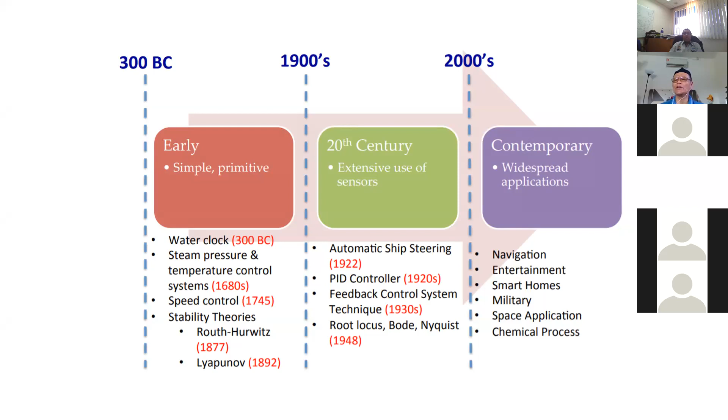And in contemporary times, applications extend to navigation, entertainment, smart home, military, space application, chemical process, and automotive, and any dynamic system. So you see this control theory has evolved since before 300 BC, and it's still very relevant now when we talk about Industrial Revolution 4.0. Control theory can be used in all these elements - it's very important.

First I talk about human control. When you're talking about control, you're talking about anything - it can also be about human. So you see, if you want to ride a bicycle, you have to know how to control the handles. You have to know the dynamics before you can have stability. If you fall down from the bicycle, it's considered that you are not in a stable condition. So that is the first thing about control.

Safety is there. And then you can see this type of control in many applications, like in your bathroom - this flush principle is being used until now. You have a float, and basically when you flush down, the float will come down, and that float basically will control the valve, and the valve opens.

Some people may feel that control theory is related to electrical, but that's not true. Control theory starts from mechanical actually. In fact, the oldest profession in engineering is mechanical engineering. So that's why being a mechanical engineer, you will be much more respected because you are considered very general engineering - from mechanical engineer, you come off into civil, chemicals, electricals, or even electronic. So this manual control is all about mechanical engineering, mechanical principle. I have a lot of respect and regard towards mechanical students or even the lecturers.

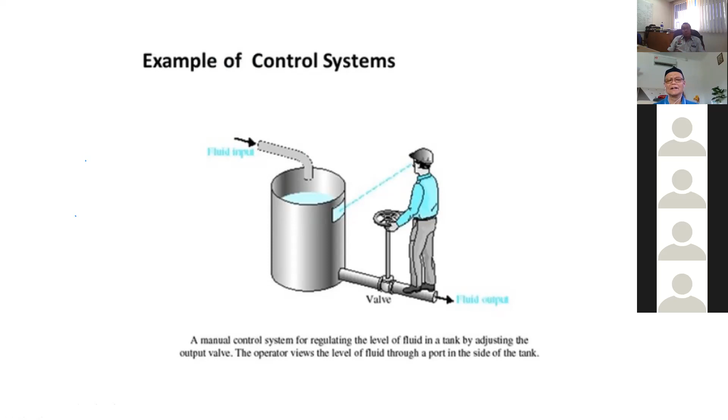And of course, I tell you, the theory of multi-input and multi-output is not easy. The mathematics is very, very tedious. But never mind, I just want to share with you what we talk about in industrial control here.

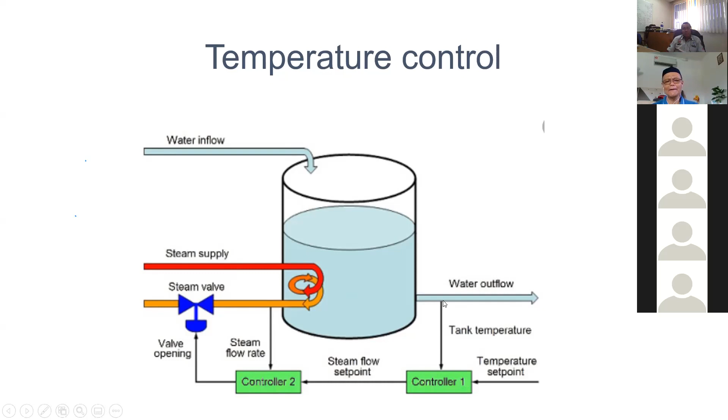So as mechanical engineers, you should be very well versed with the system. As I said to you earlier, when you talk about system, it originates from the mechanical discipline.

This is another example of using a control valve. Here you can start to see that people start to use a PID controller, for example, and then you have a flow transmitter, and a control valve to control this one.

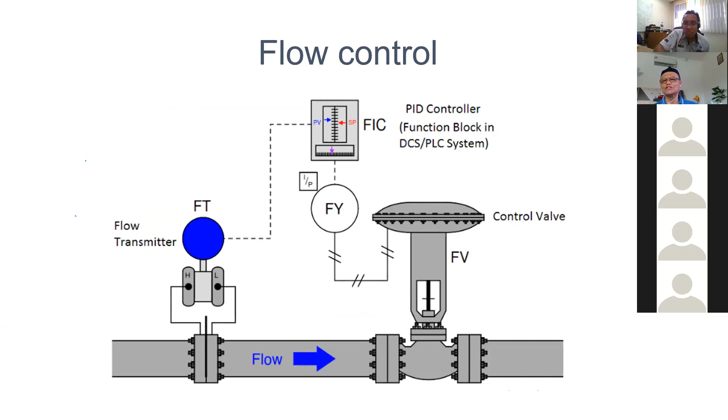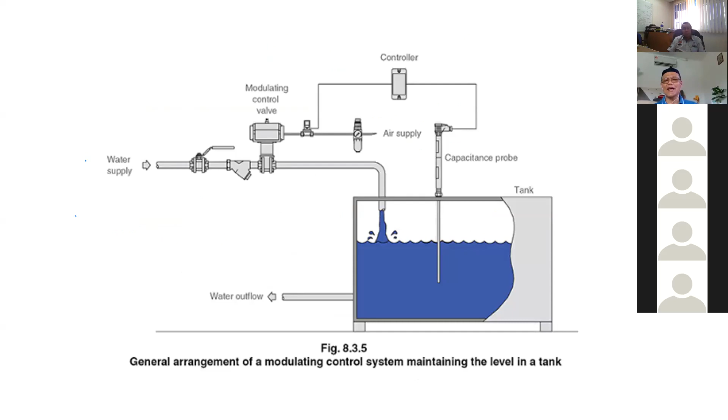Now we're talking about people going into automotive control. These are examples of using different sensors, a capacitance probe and a controller, and so on and so forth. This is another system also.

This is another example of force control. You just see for this robot with the end manipulator, you have a force sensor, so basically the manipulator will follow the gradient of the surface. So for this you need control. And again, this can also be part of industrial control in certain applications.

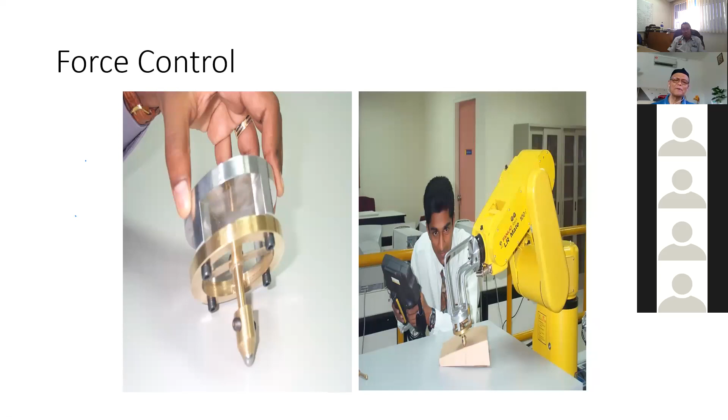This is another control that people use, vision control, for this bin picking.

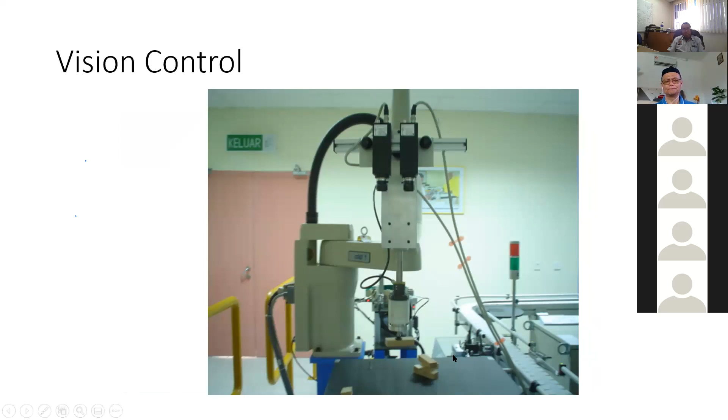And if you're talking about the automotive industry, they want to cut down noise and give comfort to the driver, so they may use active noise control or active noise cancellation.

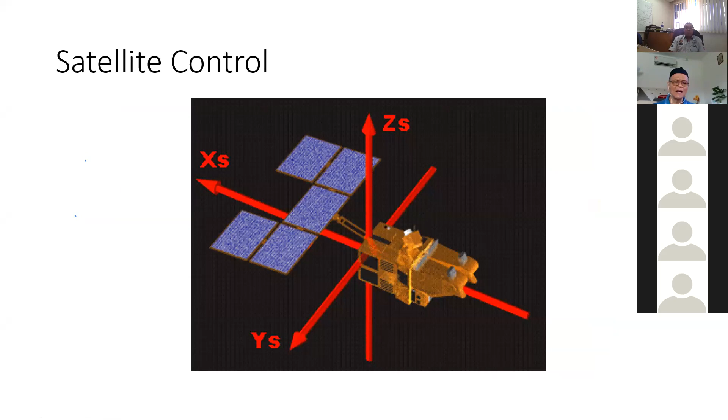This is another thing about satellite control. What I'm showing here are examples of applications that I work on with my students for their master's or PhD degrees. This is another example of process control, where you have what we call a pilot plant.

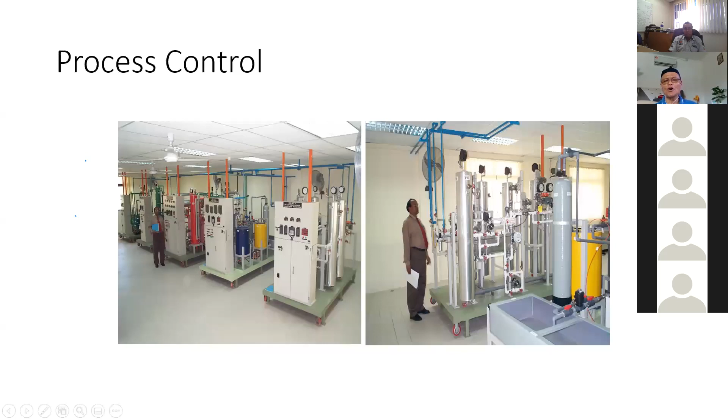I want to demonstrate a simple system. This is basically a turntable. You may not see this anymore, but before I reached my teenage years, back in the 1960s, when you wanted to hear music, you used this record. For this record, you have a turntable, and then you have a stylus that sits on the record, and according to the groove of the surface, it gives you music. But now you have digital audio, which basically translates into 1s and 0s only.

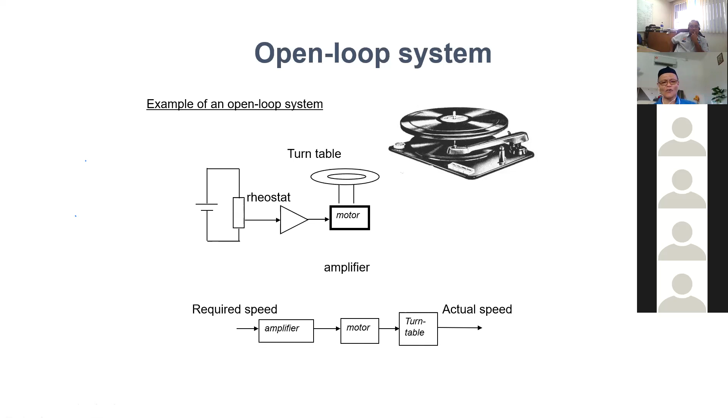You see that as a control engineer, you must be able to translate the functional block into a block diagram. So from the block diagram, then you can apply your control theory. This is the control theory that you can think of.

This is work to control the speed of this induction motor. We use input controlled by a frequency inverter, and we measure the load using a magnetic powder brake, and then we use the interfacing data acquisition card to get this data.

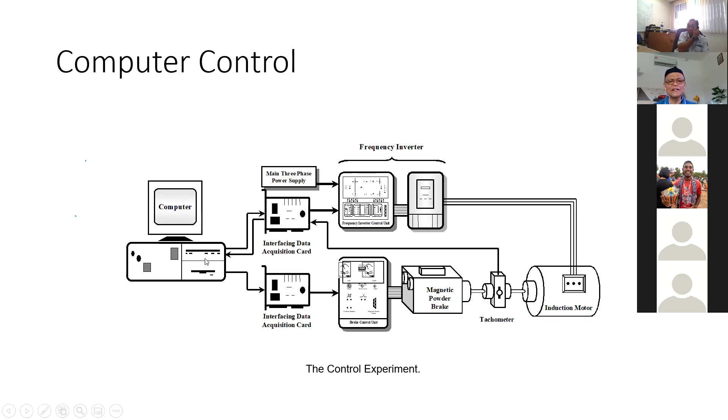When you're talking about control, you must talk about better sensors, better actuators, and that will give you a better control. So this is the part.

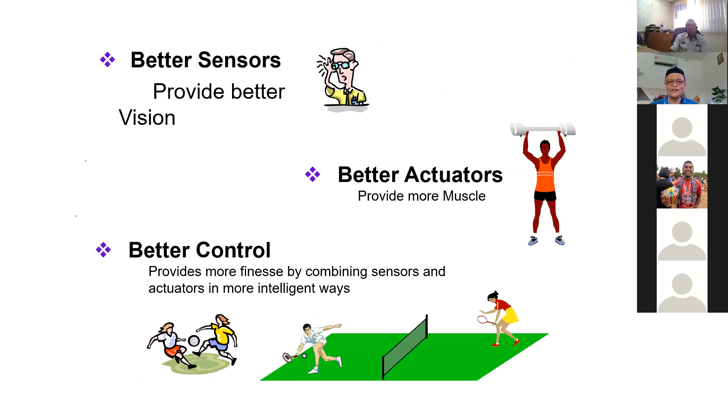And when you talk about control, you also want to know the response. In a control block diagram, you can represent all these blocks as a transfer function. That transfer function originates from a differential equation, and the differential equation is either first order, second order, or higher order.

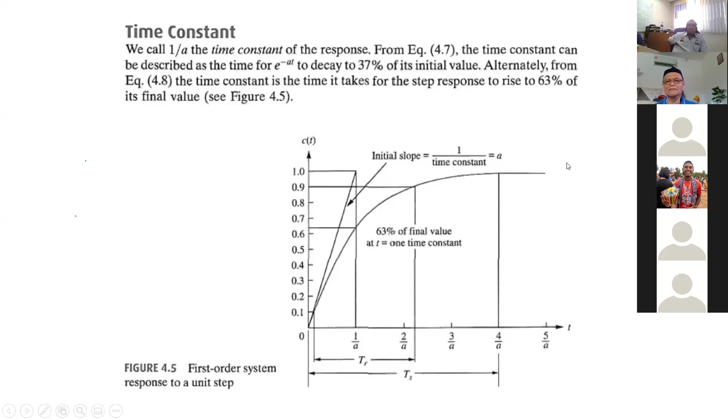So when you talk about control, you want to see the response. For example, I'm sure you learned this in control theory yourself. For the first order, this is the kind of response you get. From here, we give some parameters to that.

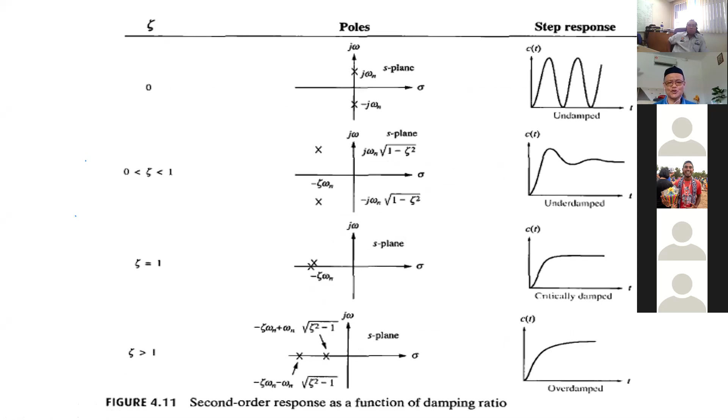This is a response of a second order. Depending on the poles and the zero position, you get various types of response: under damped, over damped, and critical damped, as shown here. This is a second order, depending on the damping ratio.

You can see that the position of the poles can designate basically your response. You can see this from the book. And I'm very happy to answer you if you're not sure of any of the slides.

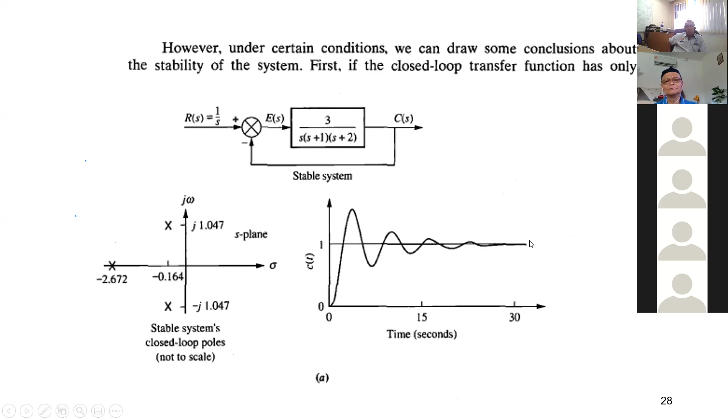I want to show you examples of control theory. If you have a pole on the left of the J omega axis, you have a system which is called stable. But if you have the pole on the right, the response will not become stable.

In control theory, we also talk about response, and we talk about steady state. One of the parameters we can use for measuring steady state is the steady state error. So these are examples of first order steady state error, and this is for a second order.

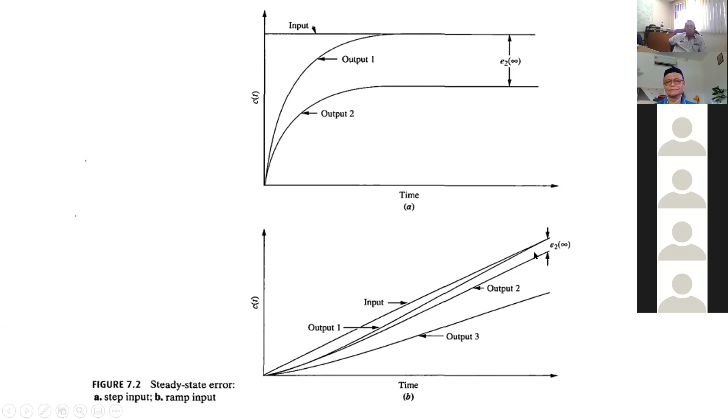Okay, and then basically from here, we can use a table that we know for a step and ramp to measure the steady state error. So I think basically I covered the first part.

I think before I go to the second part, I want you to relax. So one way to relax is to ask a question. So do you have any question to ask so far? Or do you feel that you have covered this, it's very easy, you can tackle it, or do you want to answer a question before we go to the second part? Because if I go to the second part, I'm worried that you're going to get lost or you may get bored. So I want to know the speed of your understanding before I go further. Any question?

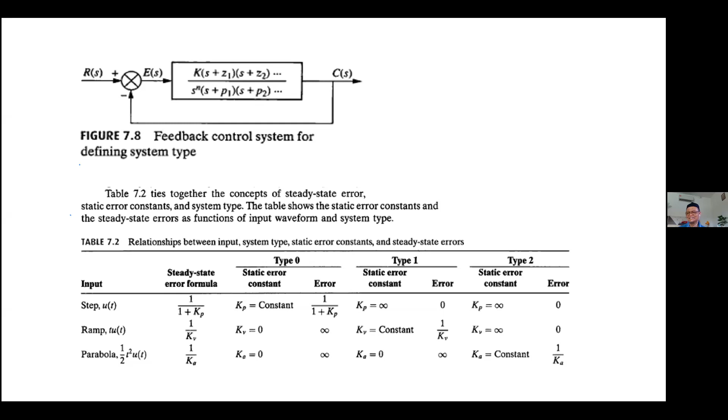No sir, there's no question, huh? Okay, I just take my drink for a while. I forgot to put a bottle next to me. Just give me a short while, I just take my water.

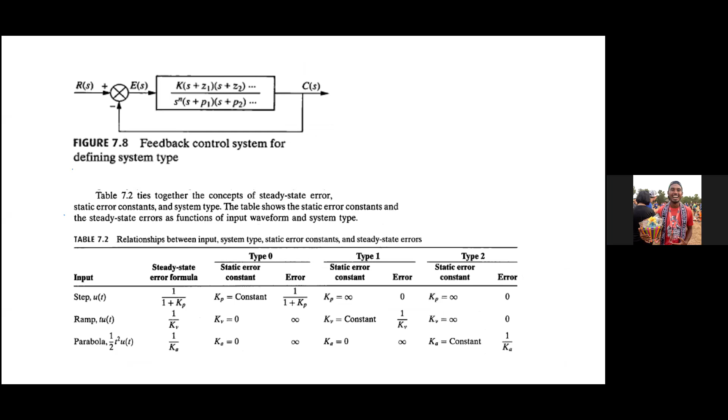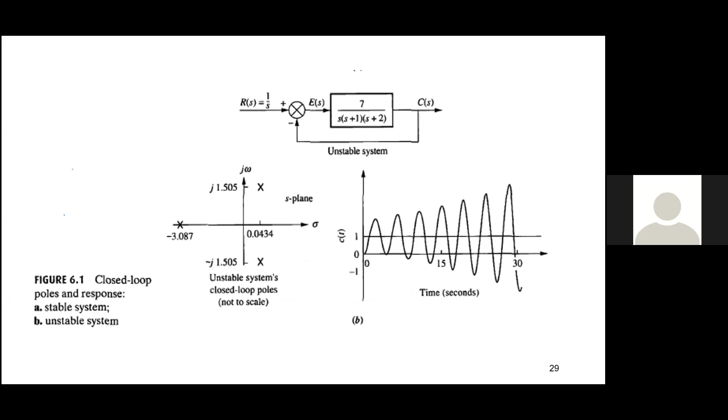Okay, is there any question that you want to ask? Sir, yes, can you go back a few slides just now for this one? Wait, where are the slides? A bit more, sir, a bit more, okay. Yeah. This one? Yeah, can you just explain a bit more about this one? Oh okay, I will explain you a bit more about this one.

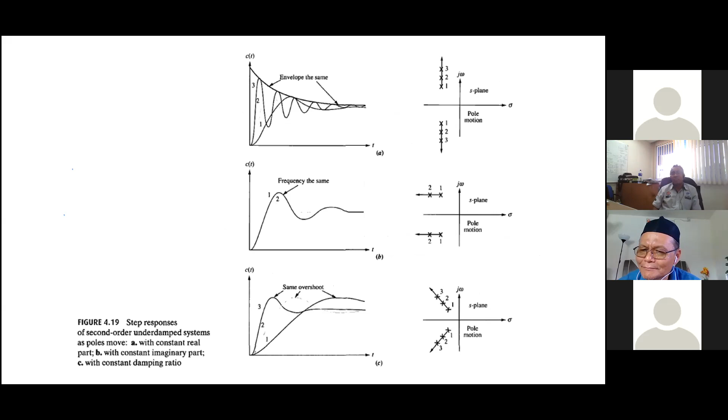Okay, first of all, you must understand about pole and zero. You all understand about pole and zero? Yeah. No. Not much. Okay, never mind.

Okay, if you look at this transfer function, you have the top and you have the bottom, correct? So the top part here gives you the zero. But in this case, there's no zero. But if you look at the bottom part, the root of the bottom part gives you a pole. For example, the pole will be 0, -1 and -2. And the closed loop of this is the pole.

So the position of the pole is very important to determine when you talk about a response, you're talking about two parts: transient and steady state. For example, when you have a response like this, you see that it is oscillating, correct? Yes. This oscillation is called transient, meaning that, and if you see the second part, the response becomes steady, and this is called steady state. So basically, in a response, you have two parts: the transient part and the steady state part.

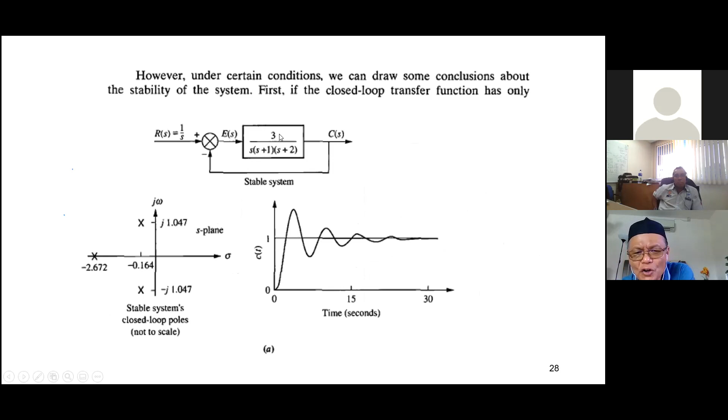Meaning that as control engineers, you must understand what kind of response you are talking about. You must understand the position of the pole you're talking about. From that understanding, you can know what kind of response your system will generate. So this is very important when you apply it in other applications as well. So what I want to say here is that the position of the pole will determine the behaviors of your transient and the behavior of your steady state.

Okay, very good. Any more questions? If not, I'll go to the second part of our lectures. I'll go into the compensator. What is a compensator?

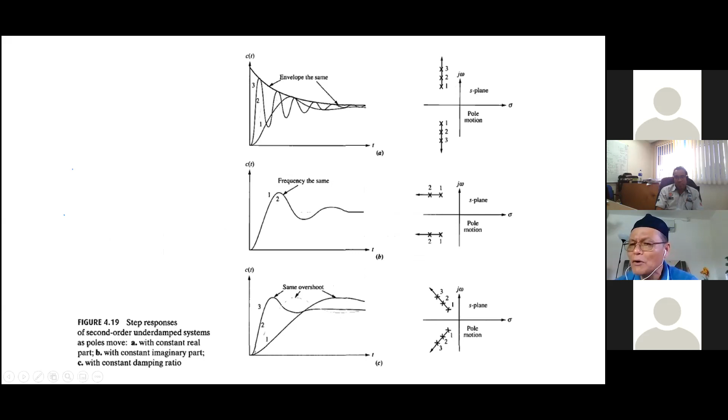That's why when you learn about control theory, the first thing you must understand is the block diagram. As I said, it will consist of a plant, it will consist of your feedback, or in this regard your sensor, because you want to measure the values of your output. So you have a sensor. And then you will also have an actuator. The actuator is basically to drive the plant. For example, if you want to control the water level, the actuator will be the pump. If you want to control the temperature of your water tank, the actuator will be your heater.

So before your actuator, you must have something that wants to control this process, and this is called a compensator, or people sometimes call it a controller. It doesn't matter, but some books define controller to comprise compensator and actuator. That's why an individual controller like the PID is actually a compensator, but some books call it a controller. It doesn't matter. But because some books call controller as the compensator plus the actuator, for me, not to confuse you, I will say that controller is made up of compensator and actuator. So when we talk about PID controller, what I'm referring to is actually the PID compensator.

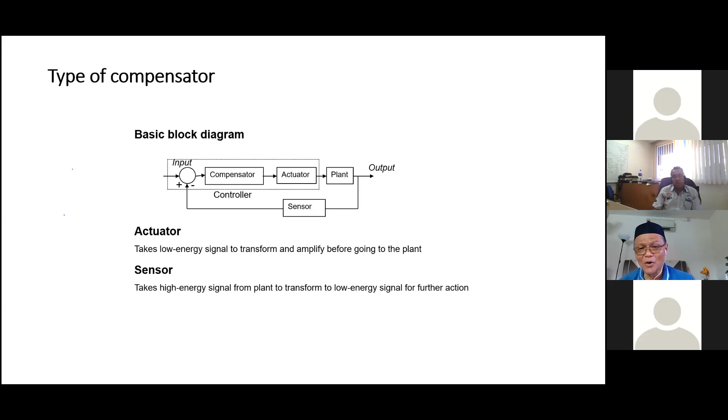So there's many issues about signal conditioning. Even I will tell you, as a mechanical engineer, you must be very well versed with the microcontroller, with sensors, because as I said, people will look for a generic discipline. So you must know also about other fields. So that's what I'm saying.

Okay, basically when you talk about this compensator itself, it can have many forms. For example, we call it a forward path compensator when you have the compensator to be here. And this is basically your actuator, this is your plant, and this is your sensor. So this is called a forward path compensator.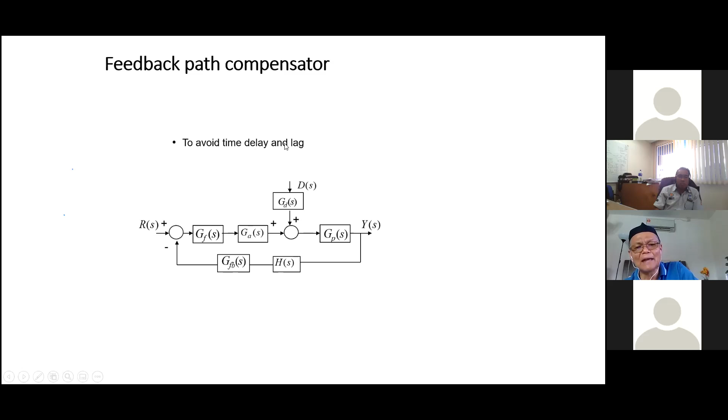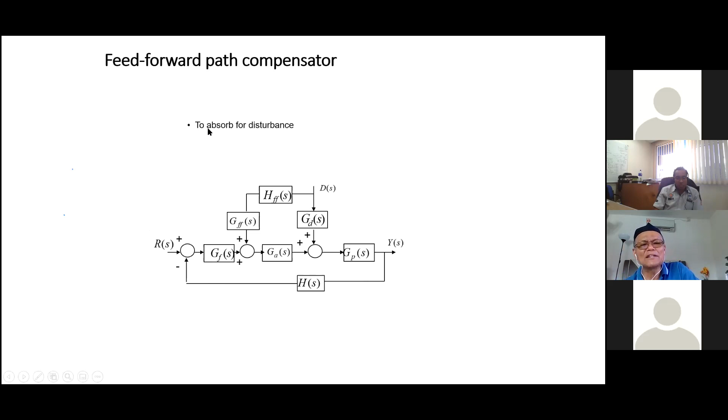And then you have a feed forward path compensator. So feed forward compensator is that you have a compensator here, meaning that you can anticipate what is the disturbance. For example, for this process graph, you have the required value and the disturbance. So you anticipate the disturbance. Basically, it's used to absorb the disturbance.

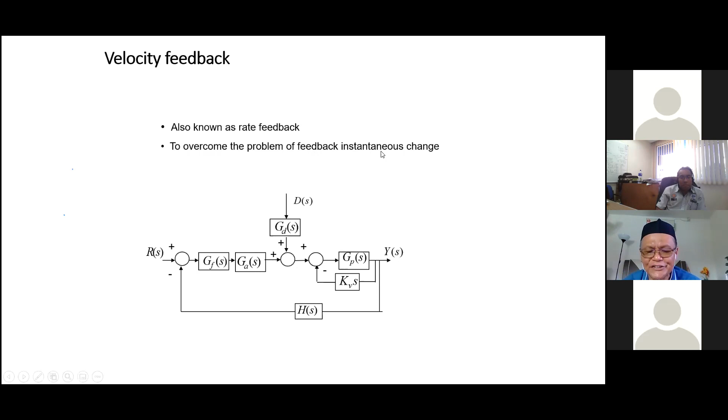So basically, that finishes our second part. I tried to finish before so that I can give you a chance of 30 minutes to ask me a question about the overall presentation. So far for the second part, is there any question?

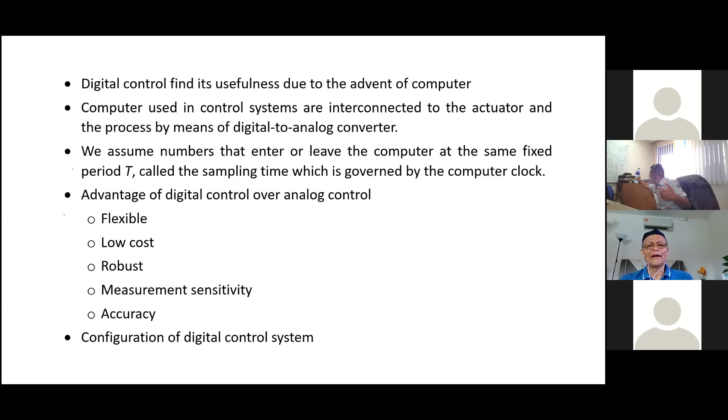Okay, and the configuration of a digital control system is like this. You see that before this we were talking about plant, sensors, controller, correct? But now, because of conversion from analog to digital, this analog signal from the output here, and the input also is analog, you need to sample it. So sampling is converting the analog to digital. Okay, and then you use your controller, and of course after your controller action, you need to convert back your digital into analog, because your plant is a physical plant, and the physical plant is an analog signal. So this is where we use digital to analog converters, just to convert the digital signal to the analog.

So another form is one where the input is analog, but you may have an input which is also digital. For that, after your output, you must use an analog to digital converter to convert the signal of your output so that it is compatible with your digital input.

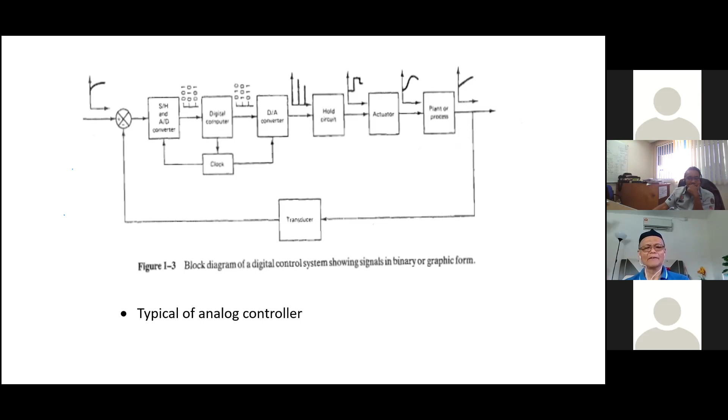I will show you how to convert this analog control into a digital control. For example, this is a good example of a simple analog speed control system - a simple analog speed control system.

I'm very excited teaching you all, so my throat becomes dry very fast. I don't know why. Maybe I have a lot of respect for Brunei people, you know. So that's why I get very excited, and I'm very happy to see my good friend Dr. Zunaidi there. I really miss him actually. I've not seen him for some time already. I feel that you are very fortunate to have him. I wish that I could also learn under him. I know he's a very good person.

Okay, let me continue. We have a simple speed control. You have a motor, and the motor uses a tacho generator to measure the velocity. This analog signal goes to a difference amplifier, and you get the input of the speed using a potentiometer. Then the difference signal goes to a power amplifier, basically to control the motor. It's a simple speed control block system, very simple.

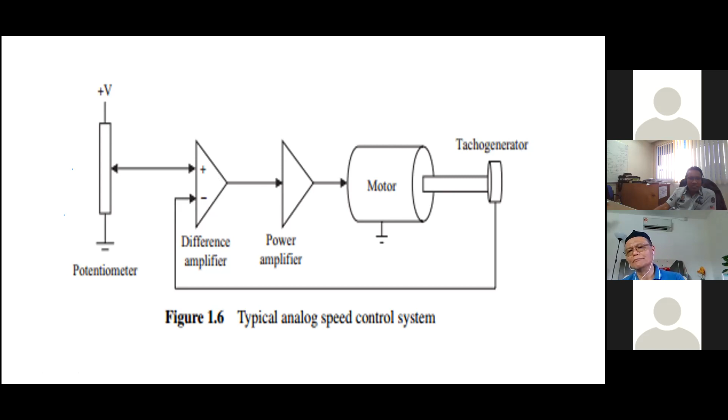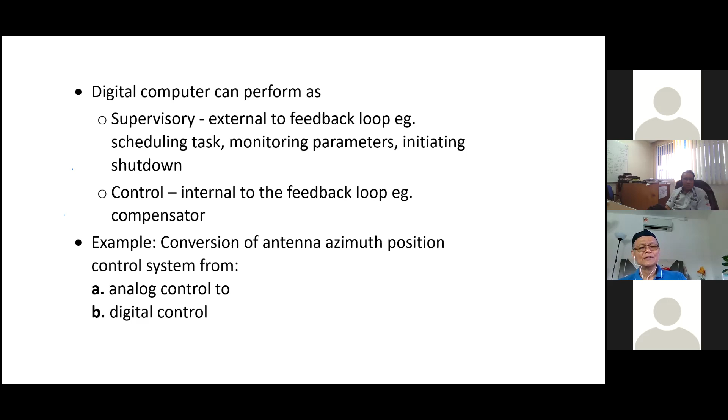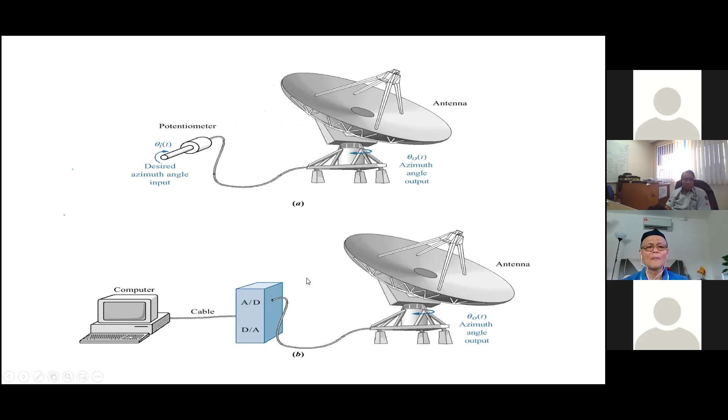So digital control can perform as either supervisory - basically external to the feedback loop that is scheduled, and this relates back to industry control, which we will cover at a later stage - or the control is basically the internal feedback loop. This is another example: angle control. For analog, if you want to control this antenna, you just vary the potentiometer and it will go through. But under digital, you must have these analog and digital converters.

Okay, in order to use digital control and signal conversion, it's required to place the computer in the loop and detail the AD and DA conversion.

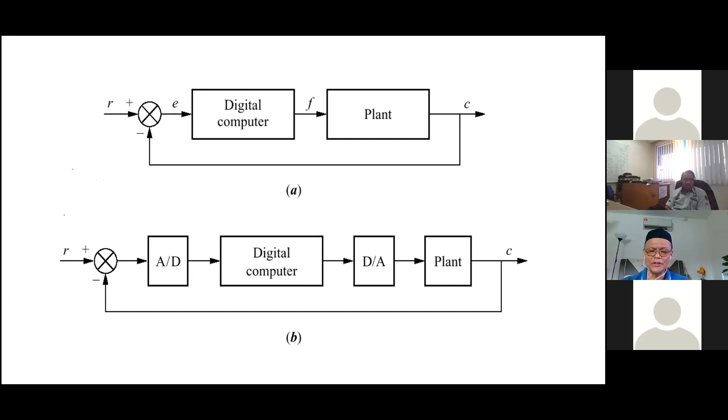So this is another example, our aircraft turbojet engine control. Basically, you have a DAC and ADC, an aircraft, a turbojet engine, and the engine sensors.

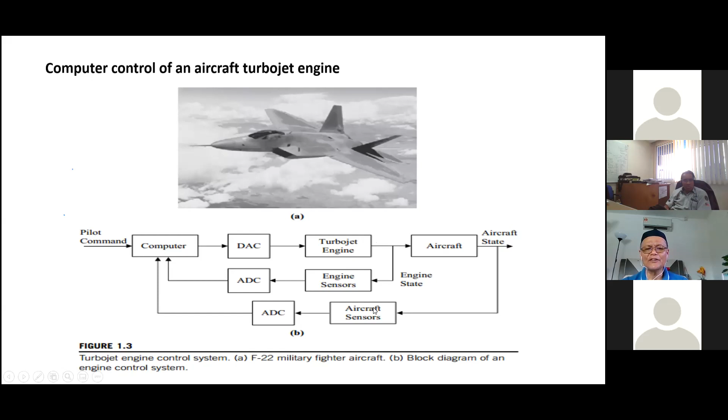This is another example of a robotic manipulator control. Basically, you want to control the manipulator, either the position or the velocity of the robot.

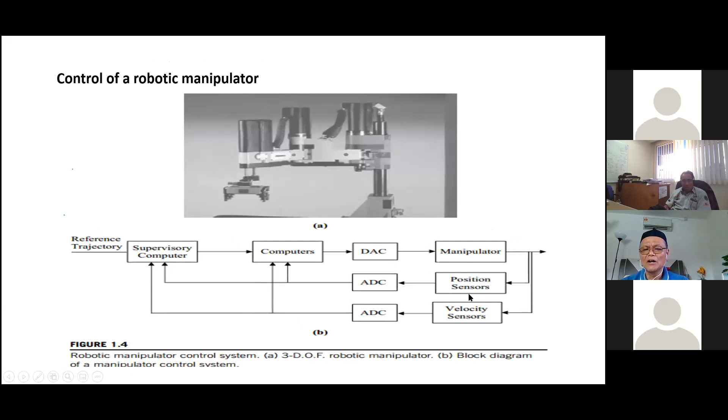Okay, basically we finished the third part. We have only two parts to cover, which is the industry control part and the PID part. Any more questions? Not for now, sir. Okay, we just finished about 1 hour and 10 minutes. I will finish another 15 minutes, then we will have a good question and answer session. I will be very happy to receive questions, and then I'll try to relate your understanding from those questions and answers.

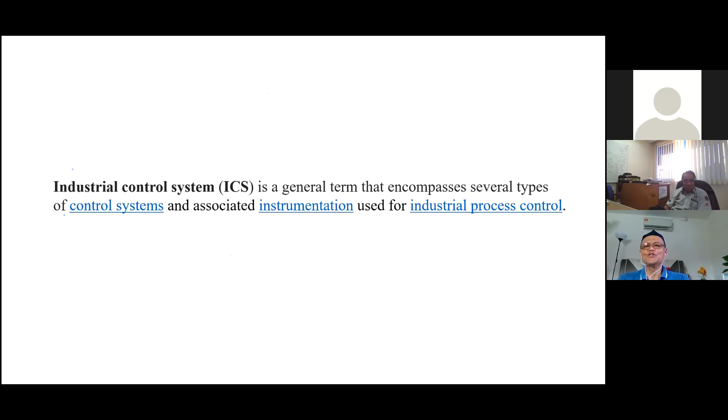Okay, let's go to the industry part. Basically, industrial control system is the control system of instruments used for industrial process. It has many forms. It has what we call a process variable, a set point variable, and it uses what we call final control elements. So basically, in control theory, the output is called output, but in industrial control, they call it process variable or PV.

The input, or required value, we call it required value, but in industrial control, they call it the set point. And then they use all these actuators, and here they term it FCE, or final control elements, such as a control valve, for example.

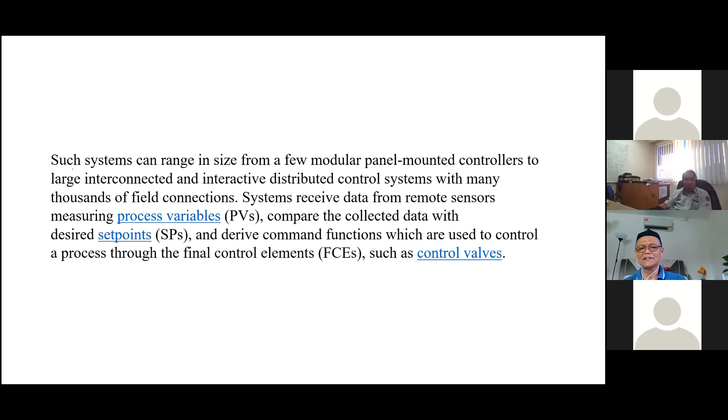Basically, what I presented to you just now is only a simple system, but you can talk about a very big and complex system, where a lot of data comes in, and this is what we call SCADA. From the data system, it can be divided into distributed control, PLC, and also RTU. I will tell you one by one.

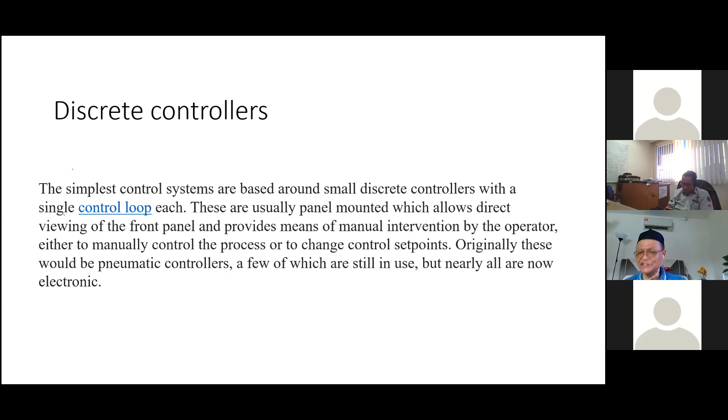Okay, basically discrete control is what I described to you earlier, which is something they call digital control. This is one of the RTU units they use for PID control.

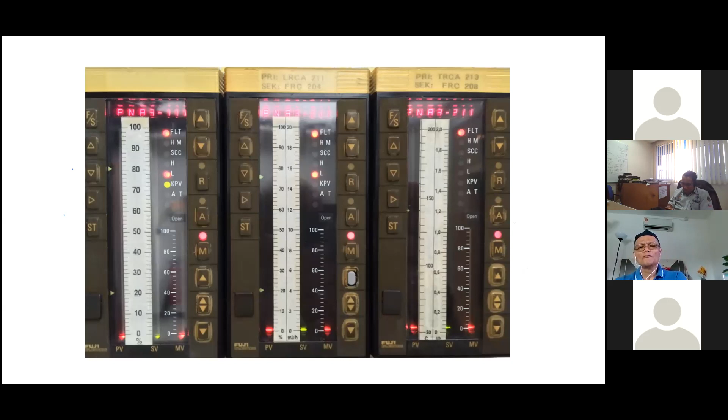Now they use what we call RTU. So basically, you will have a flow transmitter, and the flow control valve is controlled by this RTU, or remote terminal unit. Basically, this remote terminal unit gives you all the communication with the actuator, you have both input and output which get the data in, and then this will do the control.

So when you talk about industrial control, normally they use only on and off, because for industry, reliability, repeatability, and robustness are very important. In control theory, there are so many theories and so much mathematics involved, but industry prefers something simple, easy to operate, easy to detect, and easy to implement. That's why a popular industrial control method is just on and off control.

That all people call as a bang-bang control. Okay, so it's simple. One unit control is RTU. Basically it controls the current there between 4 to 20 milliamps.

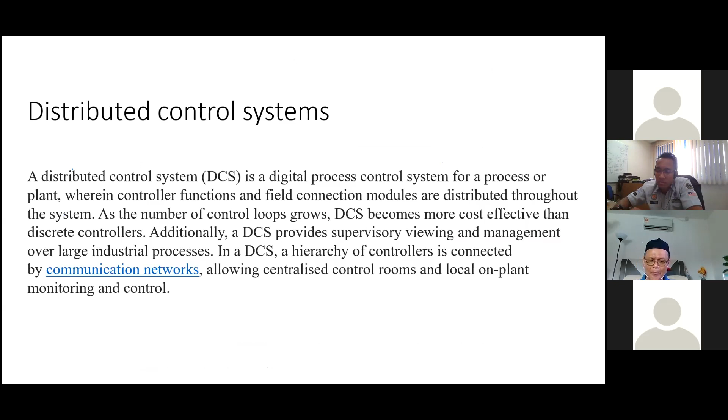And if you have a more complex system, then this RTU can be grouped, and this is what we call a distributed control system. And if you have a bigger one, we call it SCADA, not only control but also for data acquisition. SCADA stands for supervisory control and data acquisition.

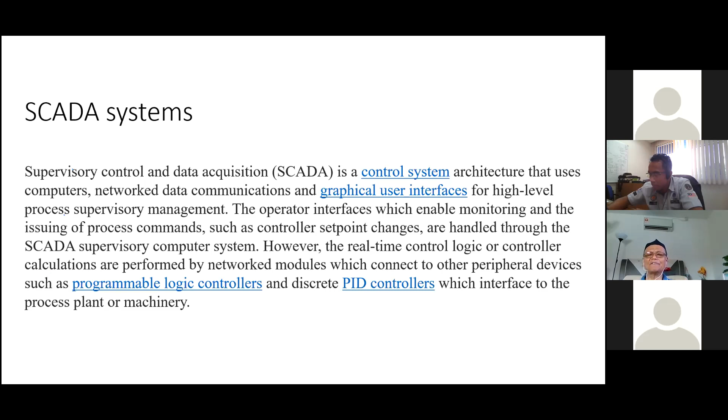Okay, so it can even have a graphical user interface. It will have your PID and your PLC. So this is examples of a very distributed control system. Okay, you see that this is your plant.

So when we talk about industry control, it's more about using control theory and getting something done and then interconnecting it. That is more of what they call it.

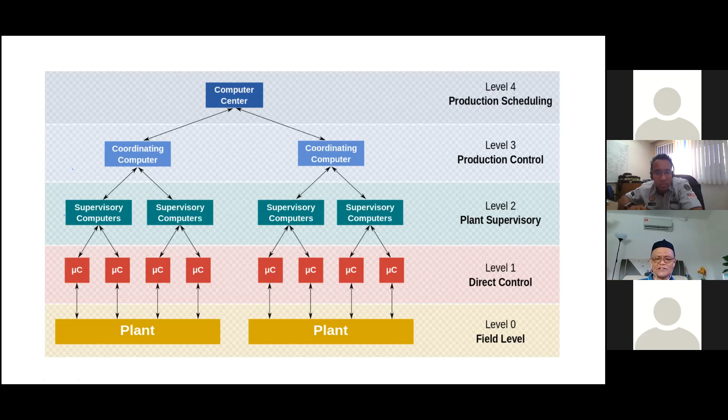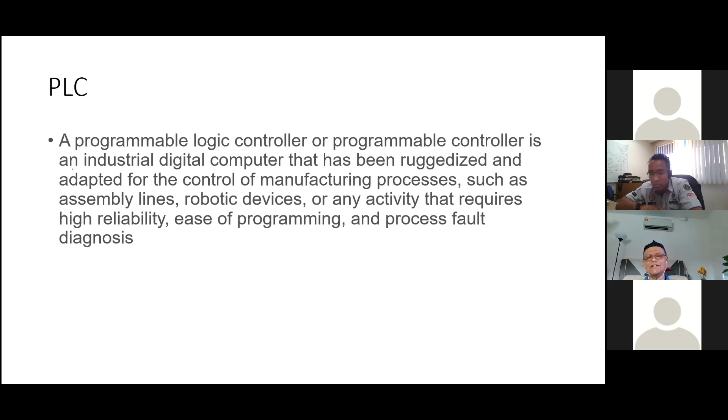And before the SCADA, you also have PLC. So again, PLC is basically this RTU for on and off, of course with many switches. Basically, a PLC is a programmable controller for industrial control that is ruggedized and adapted for control of manufacturing processes such as assembly, robotic devices, and activities that require high reliability, ease of programming, and process fault diagnosis.

PID controller. Okay, again, I'd like to share with you some simple block diagrams first. This is your plant, this is your controller, this is your feedback. So basically, you can see from control theory...

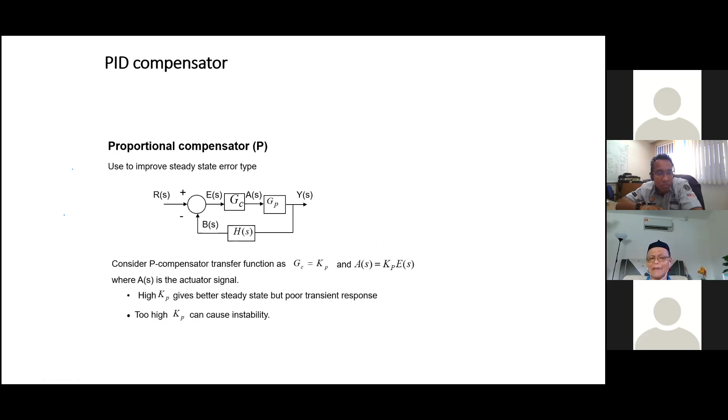Your controller is, let's say, proportional. It's just a gain, KP, and the output of your actuator here is basically the error signal multiplied by this gain, you get this. So basically, if you give a high value of KP, it gives you a good steady state error, but it has a poor transient response. And too high a KP also causes instability.

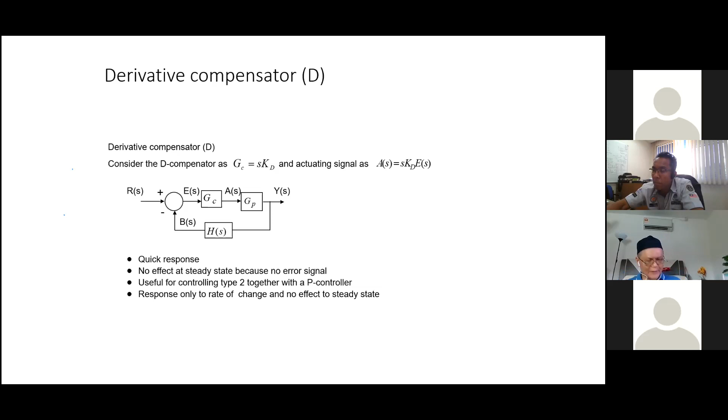And finally, you're talking about the derivative. So in derivative, basically, the good thing is that it will reduce the rate of errors. In proportional and integral, it reduces the error, but this one reduces the rate of errors. So it can cut down any oscillation, any overshoot even faster. The answer is quick response, no effect at steady state because of no error signal, and it's useful for controlling type 2 and above systems.

Basically a combination of proportional and integral gives you PI, and you can get this kind of transfer function, or another form would be something like this.

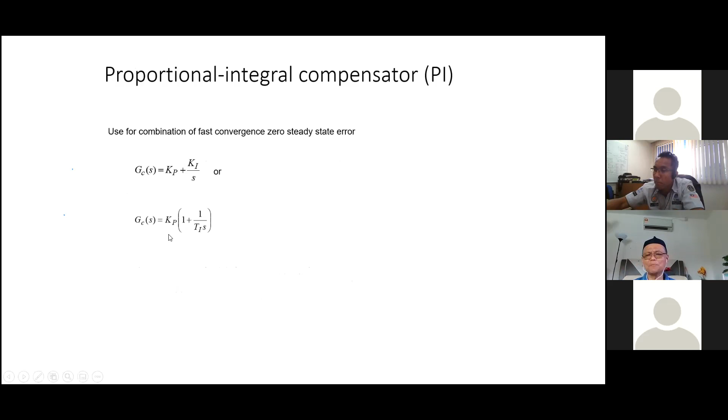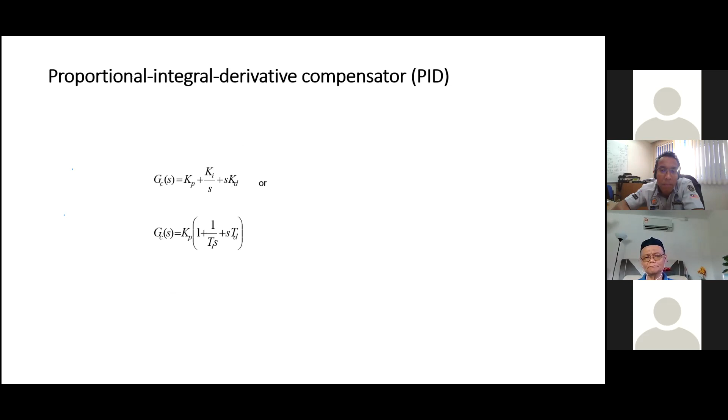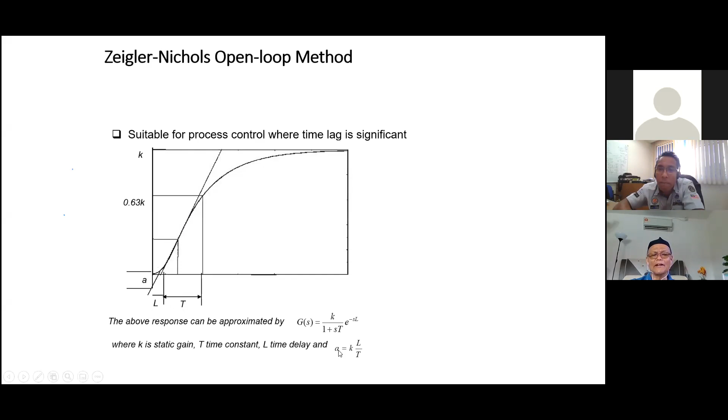So you will have parameters K, L, and T. From that, you get a parameter called A, and from here you can use a table to determine your PID values. That's how people do the tuning. But please remember, tuning in this method is only an approximation. You have to do a fine tuning manually.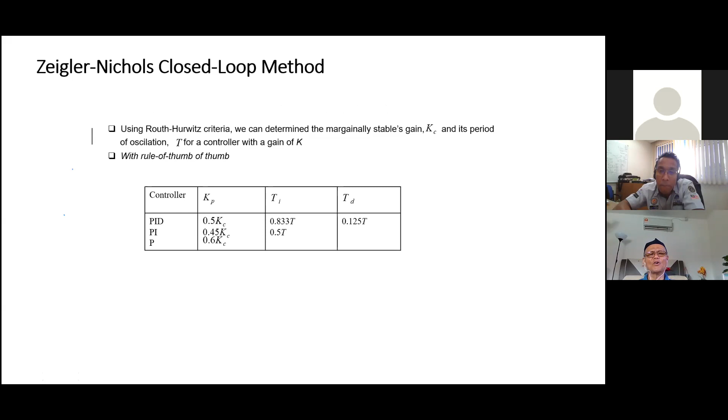And then the second method is called the closed loop method. It's basically looking at the stability gain and also the oscillation time, and it is given by this table. For example, this is a simple transfer function. From this transfer function, you can determine the characteristic equation, and you can use a Routh array.

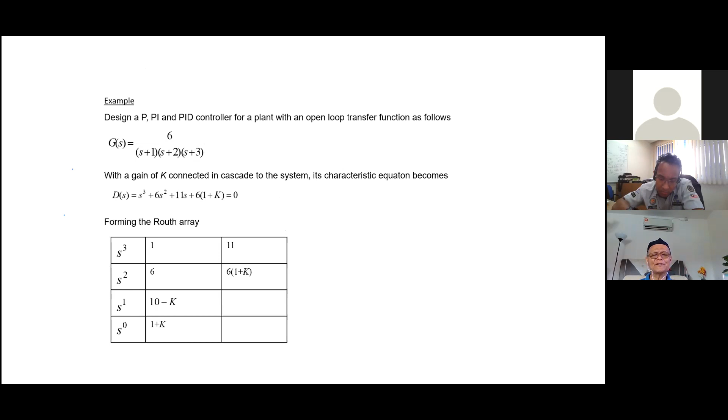And from the Routh array, you can measure your K and your T. Basically you get your K to be 10. Of course, this is the theory there. I'm sure you have learned also about this, but I just want to show you.

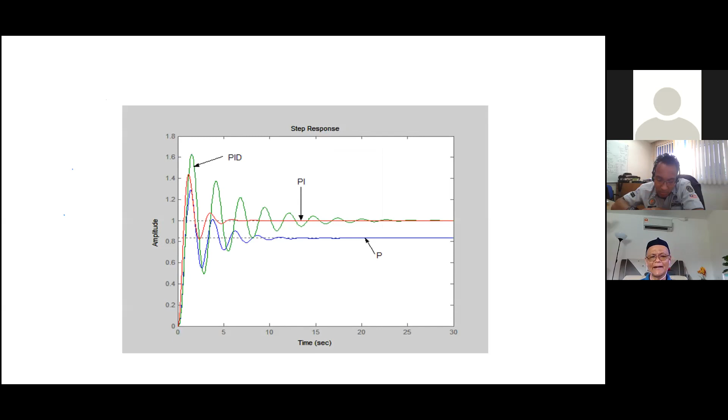And this is the kind of response you can get from the P, the PI, and the PID. And then, of course, now people use the PID controller using Simulink. So you see that in Simulink, basically you have your proportional, your integral, and your derivative there.

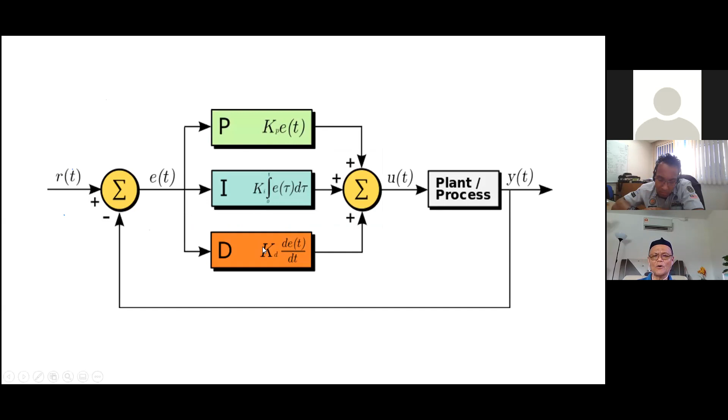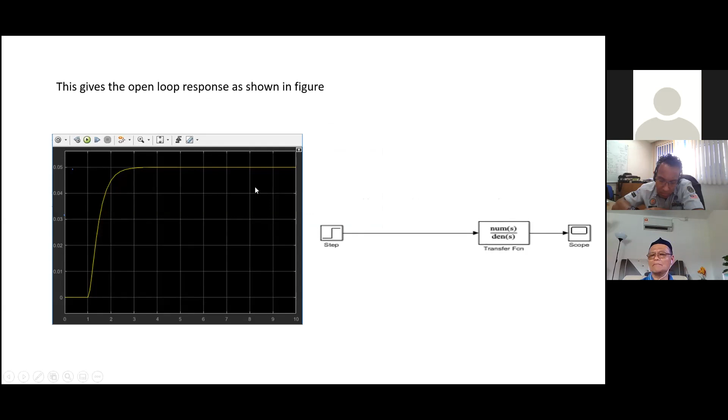Okay, and basically, you can see the response in Simulink of a P, of an I, and of your PD, and your PI, and your PID. But the best part is that you can use a simulation block and then do the automatic tuning, and from here you can get the best tuning effect. That is from MATLAB.

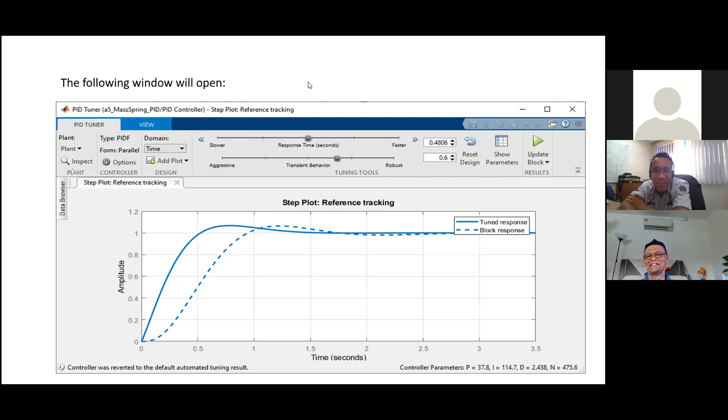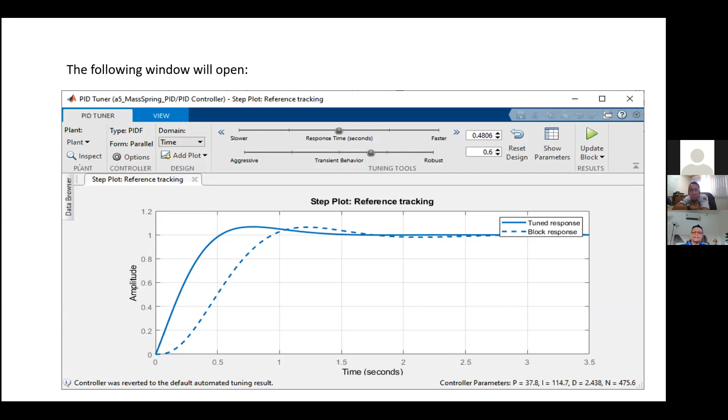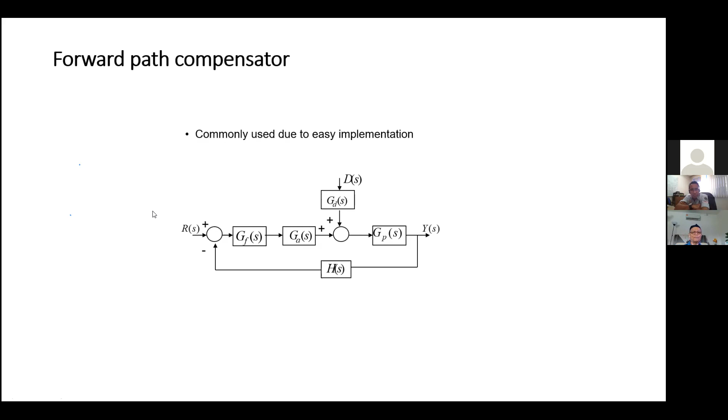But if you were talking about avoiding a time delay, maybe your system here is very critical in terms of the response, you need to do immediate action. Then you use this feedback path compensator, whereby you locate the compensator here.

So basically, this is to avoid time delay and lag, meaning that the point I gave you here is to give you the convenience of which controller you want to use, depending on what kind of problem you have. You know better about the problem, okay?

So you use a time delay lag compensator because this control action to be taken here takes time. For example, if you're talking about digital control, you need time to convert from analog to digital, you need time for the control action, and then you need time also for digital to analog. If that is critical, you use this feedback path compensator.

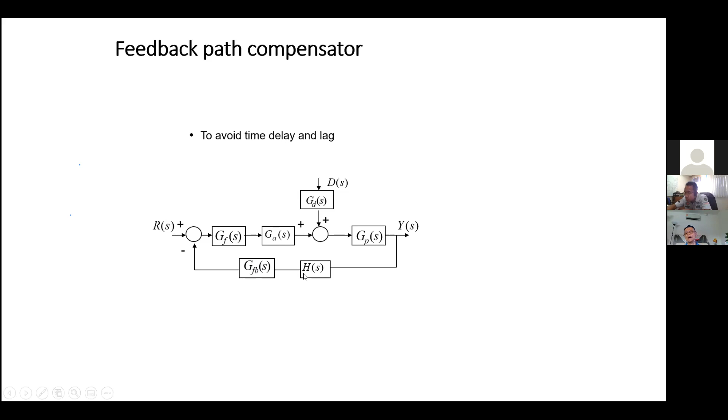You put the compensator directly after the sensors. So if you're talking about, this is your input, but sometimes you have also disturbance. Disturbance can be external factors. You want to tackle this disturbance, and you anticipate that, for example, you are driving a car.

You anticipate that in the front there is a climbing hill slope, meaning you anticipate this will be a kind of disturbance. Then you put the compensator in this form. And if you're talking about eliminating a minor disturbance, you can put a compensator in the inner feedback. And if you're talking about velocity feedback, instantaneous time from your plant, then you use this velocity feedback.

So, Stephen, basically the type of compensator you use depends on your problem. So that is my answer to that question. Okay, Stephen, am I answering your question?

Yes, sir. But to iterate more regarding this, for the topic on the PID controller, where you mentioned how certain compensator types reduce the steady state error, go to zero steady state error, can you explain more about that one? Which one would have to be?

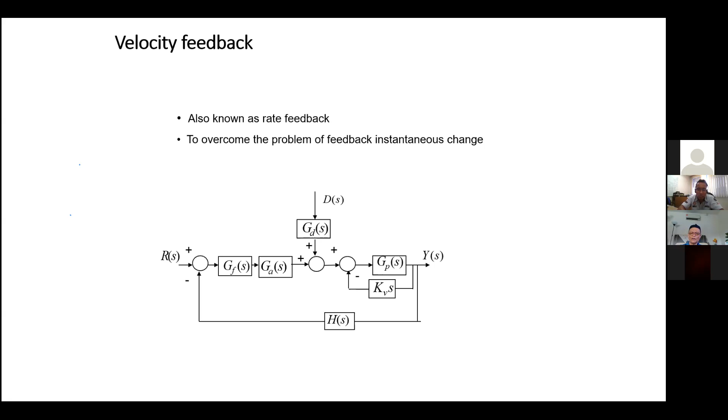Okay, very good. Now I'm talking about this PID. When you're talking about PID, there are three components: proportional, integral, and derivative. Proportional is good because it gives you a fast action. But in order to get a zero steady state error, you have to have a high gain, just like here.

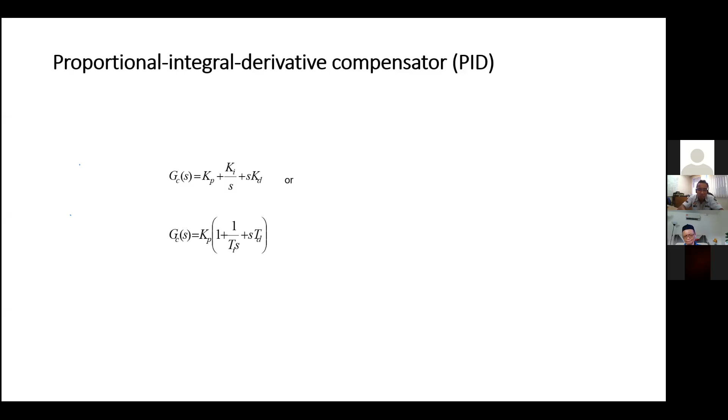In order to get a zero steady state error, your output should be equal to 1. If your input is 1, your output is 1. In a control system, it follows your input. If your input is 1, you get 1, that's a very good control system. If your input is 1 and you get 1.05, it's not good, that means you have a 5% error. But if you see from this transformation, Kp over F plus Kp, and this F is a friction.

And friction, as you know, it depends also on time. Sometimes when it is hot, the friction is higher. So basically you have to control the value of Kp. And we know that if you increase this value of Kp too high, it becomes unstable.

To ensure zero steady state error, you use an integrator. But the integrator is very slow. So you use a proportional and integral to tackle that. But there is a time you have overshoot, and your system cannot sustain a high overshoot. So this is where you use a derivative.

So the combination of proportional, integral, and derivative will give you a very fast response, zero steady state error, and a reduced effect on your transient response. So you see that the combination of the PID will give you all this effect.

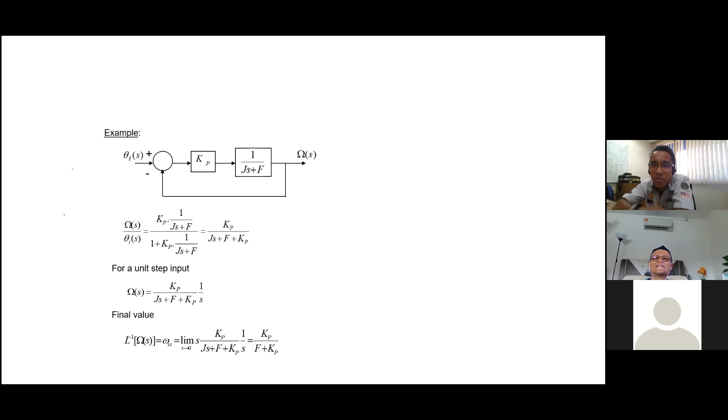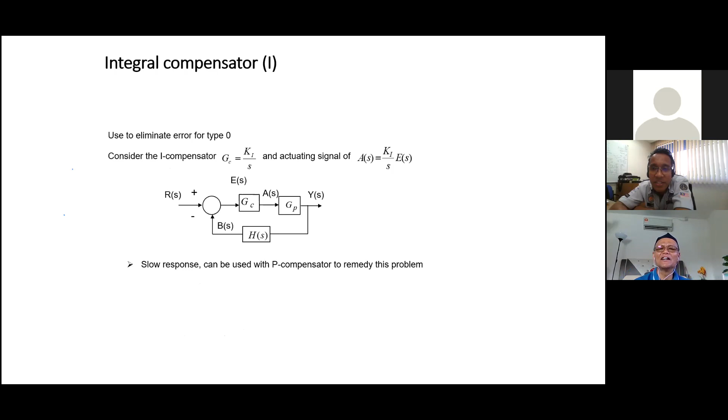Sure, so can we turn on all the cameras please? Let me put myself in my most handsome position. Okay, Prof, I'd like to see everybody. Stop sharing the screen, Prof, stop sharing the screen first. I stopped sharing the screen. Okay. Can everyone turn on their camera please? Yeah, I would like to see everybody. Yeah, we can say hi to Prof and then take a photo.

Hi everybody. Okay everyone, you're now in the classroom, huh? Oh, you're in the classroom. Some in the classroom, okay good. Alright, thank you, let me take also my print screen. Okay, so now Wafiq, stop eating for a moment. Okay everyone, 1, 2, 3. Okay, with that, one more, 1, 2, 3.